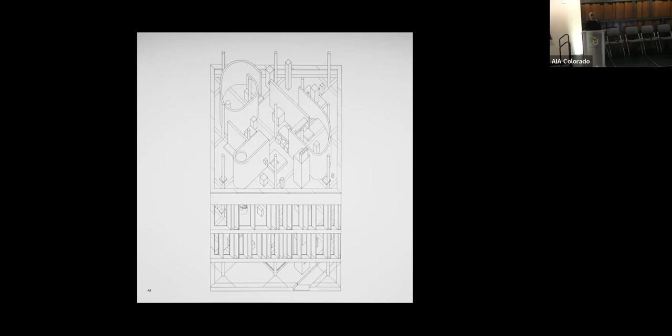But at the moment that I was then appointed as the dean of the Irwin S. Chanin School of Architecture, I also came full circle in confrontation with the work of John Hejduk, whose legacy served as the foundation of the school for over 30 years, and coming into recognition with what I found were some of the more formidable moments of his pedagogy.

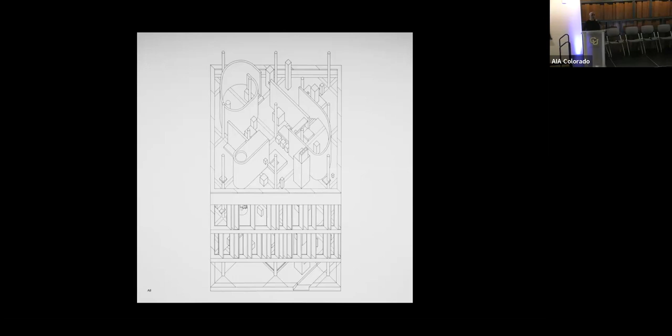This drawing is just one of the many chapters where you see the relationship between the plan and the elevation come into formation precisely through the collapse of projection, something that normally would seem illegible precisely because of the 90-degree angle. But in his case, the agency of that, the instrumentality of that kind of drawing allows him to rotate the non-supporting walls within the context of the free plan, which is suggestive of a way of drawing and thinking at the same time.

So the notion that drawings don't illustrate a preconceived idea, but that drawings are always already a mode of thinking through an idea, that the ideas evolve after the fact. Now, within that context, I was asked to do a drawing for the Storefront for Art and Architecture.

And I realized that somehow this is something that Steven Holl would never have done, but I wanted to apply the animate thinking to his project. Here you see the elevation rendered, as it were, in perspective, one point.

The rotation of that as a flat axonometric. Its rotation to show the thin end and the wide end. The line work is not showing, my apologies.

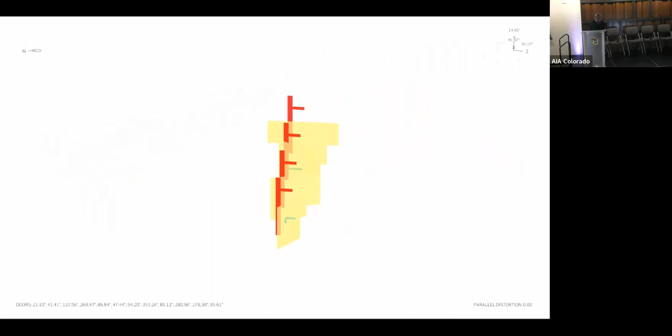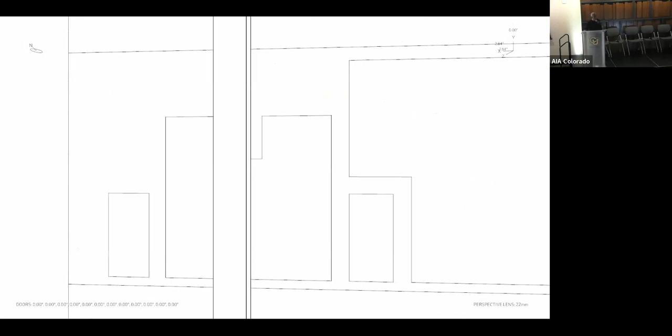Going from orthogonal projection to conical, slipping inside to see the projection itself, and then finally a rotation to a realist mode as we open the doors once again and frame the views of the outside, in a way capturing certain ideas embedded in different representational modalities compressed into one.

It's not a collage, it's more of a montage where these different modalities are brought into confrontation, where normally they would be done in what I would call an analytique, the French Beaux-Arts technique that we've seen, that projected often Renaissance relics, projections for archaeological digs that would imagine architectures that they didn't actually know existed, but through the fragment, a kind of design process would ensue. And the idea that even the fragments may have inconsistencies in them to demonstrate possible different ways of having conceived of the project.

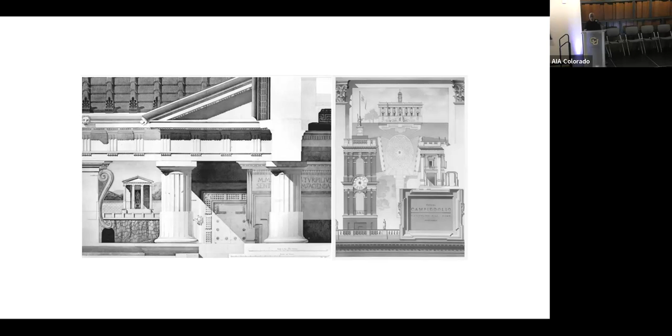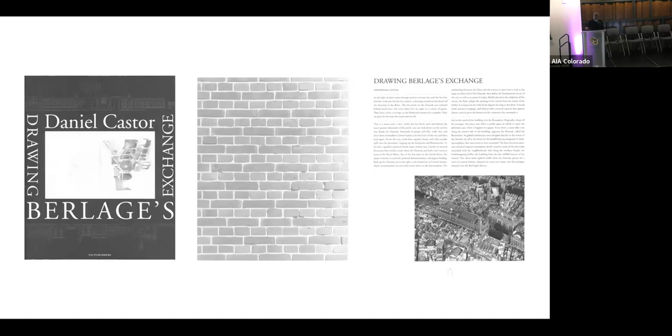So translating that to the work of Daniel Castor is an important part of this talk. A classmate of mine many years ago did a Mode B thesis at Harvard analyzing Berlage's Exchange building, which involves some of the most foundational things that I imagine all of you would find rather rudimentary and boring, but that is at the core of this discussion. And that is why we draw, why do we draw this way, and where might it lead us? I think his thinking had a significant impact on me.

He really brought it back to the kind of 101 level, the idea that he went to the building, took photographs of it, established the elevations, folded them out as you might in any archaeological dig.

And we applied that to a project, which I'll show you very quickly now. The project spans 20, 30 years ago, but it is the means through which I drew and then learned to draw again, and then again, through your generations. And now, as I look into the crowd, you're pretty monolithic as a generation, but I would say your grandfathers and your parents are also represented here.

So I'm learning how to draw again and again, basically going from sketching to drafting to AutoCAD to FormZ, and then to Rhino, and then of course to scripting at the end. So this is what you know best, so I'm not going to belabor it.

Essentially, this is the moment I was in partnership with Monica Ponce de Leon, where we went to Caracas and discovered the terracotta blocks, bricks, and tiles. I did this sketch on site, which effectively articulates what was possible to do for Casa La Roca. Not an entire courtyard building, but an L-shaped courtyard building with one brick screen wall that effectively blocks the in-laws next door, opening up to them but also concealing them, while framing the view of the rock after which the house is named.

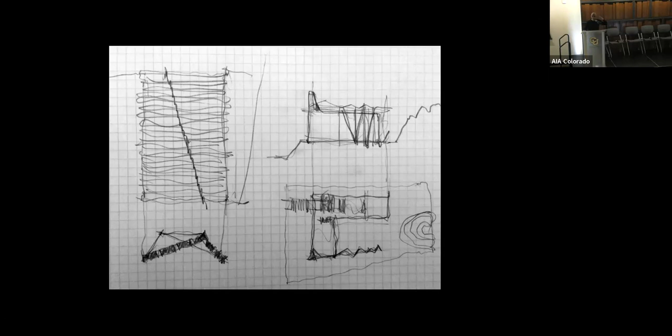Now, keep your eyes on the sketch to the left, which effectively shows a mode of thinking through drawing: a brick wall that through the fold gives lateral stability, something you are well versed with in the work of Eladio Dieste, Candela, etc. Within that context, bringing the discipline of drafting, the projection of a composite drawing from plan to elevation, to invent what we thought was the variable bond, essentially a rejection of the running bond on the one end or the Flemish bond on the other. The idea is that the mortar is the main protagonist here because it varies in dimension, a parametric construct intellectually speaking, drawn here in pencil to allow for the passage of light and air through what is a wall that is conceptually and figuratively a curtain wall.

Importantly, it also is a moment where you begin to see the instrumentality, not just of drawing, but materiality playing a role in that tectonics. The brick is not cut at that most critical moment of the junction of the diagonal. That is exactly the element that allows for the incremental corbelling to happen and the dovetailing of the brick.

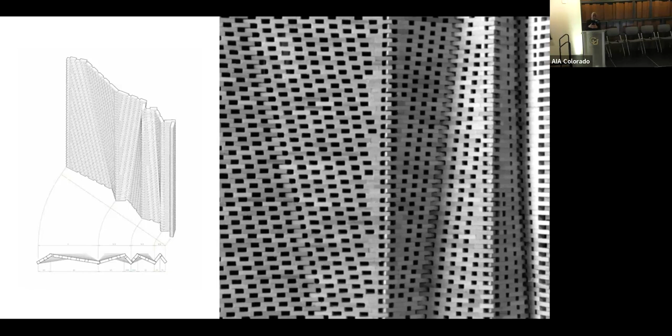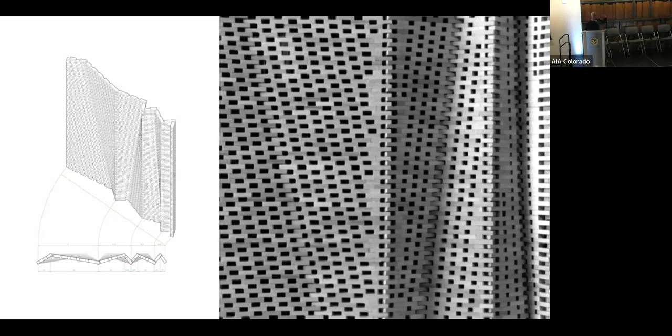Here, the model is not used as an illustration. It's a simulation of construction, although it's a half-inch-to-one scale model, about 2 feet tall by 6 feet long. It explains the kind of pre-installation mode of working that we were undertaking before we entered into a world that you are also very familiar with.

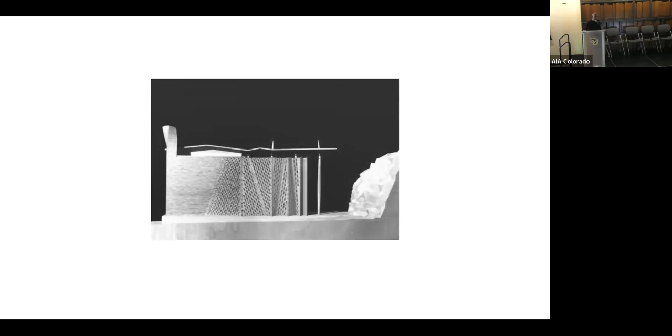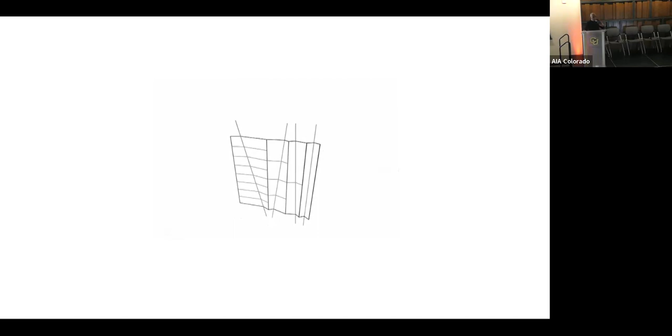The next chapter is when we actually learned how to do animations and established a dialectical relationship between the animate process and the photographic one, showing a kind of connection between the two, and the demonstration that at the end of the day, what you're doing when you're designing this wall is you're drawing out a very low resolution ruled surface.

In other words, you're not connecting the two upper and lower lines with lines, but with essentially bricks that are incrementally rotating in order to do so. I think everybody in this room has done one form of this or another.

This is a chapter you all know well, having to do with the advent of scripting that came 10 years later, illustrating the variable bonds that had been conceptualized two decades earlier. Now learning how to script something in a language which is non-visual but has radical compositional and visual implications, advancing that to the morphology of the building.

Keep your eyes not on the center of the page but at the four corners, because it is all being done numerically at this point. I nod my head to all of you who actually know how to do this in your dreams and sleep, what I still struggle with to this day.

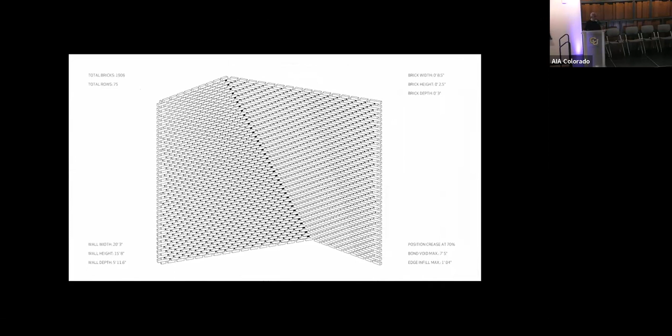So I take your attention back to Daniel Castor's work, which takes us to that delicate passage as you go from plan to elevation to section, and then to axonometric, particularly to the idea of the Choisy, reminding us that often it is not God's vision looking down on architecture, but actually the reflected ceiling plan, or RCP, that is the protagonist of architecture.

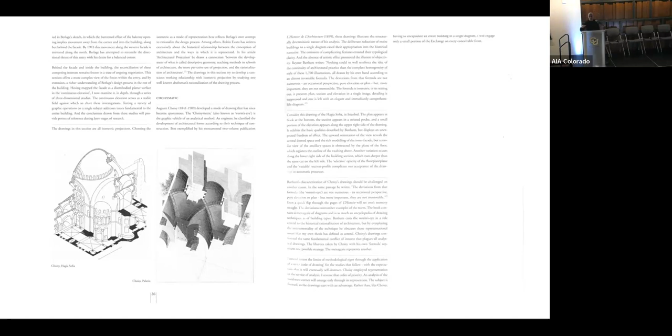St. Peter's is not a dome, it's two domes. The dome you see on the inside is different than the one you see on the outside, and the Choisy is one of the modalities that explains that. You could say the subheading of this talk is also about the reflected ceiling plan - it's just another way to begin this discussion.

As he progresses with the research, describing different ways of drawing, one of the most interesting chapters is the isometric, where the 120, 120, 120 angle gives equal weight to the plan and the two facets of the elevation. A sectional oblique gives dominance to the section or elevation, as a plan oblique gives dominance to the plan. This is one where the neutrality means there's something else at work.

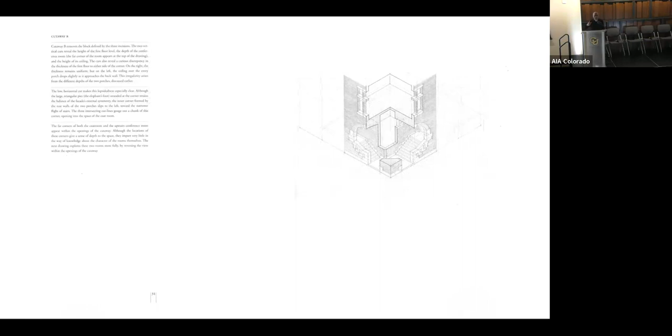Then all of a sudden he gets to the flip-flop representation, which completely changes everything, because the picture plane - that is the section of the window - is being looked down upon and up at it at the same time. Only the isometric allows that, because the angles are equal. So that inversion is possible, where you're looking up at the vaults from the inside, but from the outside you're looking down on the stairs. This allows you not only to imagine projectively how a project may be designed, but also how to analytically take something apart.

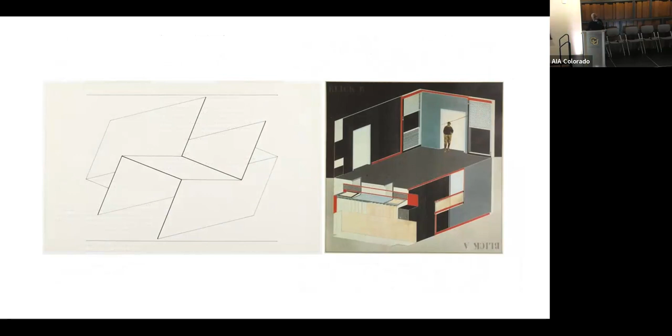Something I doubt Borromini was doing while designing, but this is now Castor doing this for us. Of course, he's not alone - El Lissitzky and many others have done things like this in the 20th century, but it's also a way of identifying a kind of disciplinary function that we all participate in.

I was asked to go to the American Academy a few years ago, and I saw in their billiards room a drawing by Michael Graves, very gestural, very rough, of the Tempietto - something you may have imagined done by Gehry, so very un-Graves-like. But it inspired me to go visit it again; it's only 100 yards away.

There are two things evident in visiting this project. The first is the axiality of the frame door into the courtyard and its relationship to the mantle, which is an extension of the poche of the wall, the thickness and mass of the wall, the solidity of this, displaced from the center - the apse is off center. Many of you have read the Robin Evans article that describes that, only to discover that as you round toward the back, this solid mass is a thin veneer. That mantelpiece is actually a thin slab of stone that makes a collusion between mantle and window.

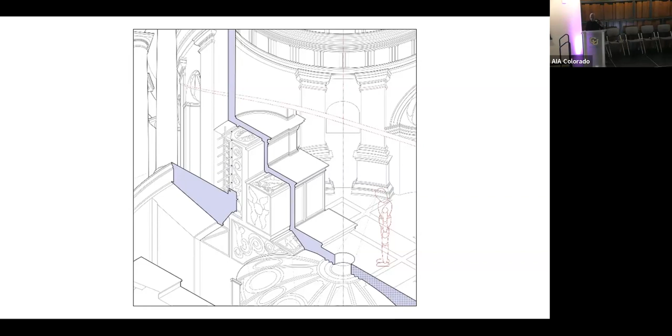As you walk around toward the back, there is a staircase and an oculus - a window actually - which ends up being an oculus that brings light to the crypt behind it.

There is no window without the mantle. There is no mantle without the window. These two come into dialogue with each other, which makes it all the more alluring as you realize that St. Peter's was planted upside down, looking up towards the sky, effectively looking at the reflected ceiling plan. That the cross was not planted like Jesus allows for a drawing like this conceptually to be done after the fact—six drawings done in one, looking down at the dome, up at the dome, down at the mantle, up at the oculus, and then down at the plan of the crypt, and of course looking up at St. Peter's, looking back up. Again, a flip-flop building done in the manner of Castor, but here done to a project which is not indifferent to the conceptual function of the flip-flop.

So as we begin to apply this format of thinking to the projects, I'll try to go fast through all of this in a more descriptive way, using the animations both as generative tools as well as post-game analysis of the projects.

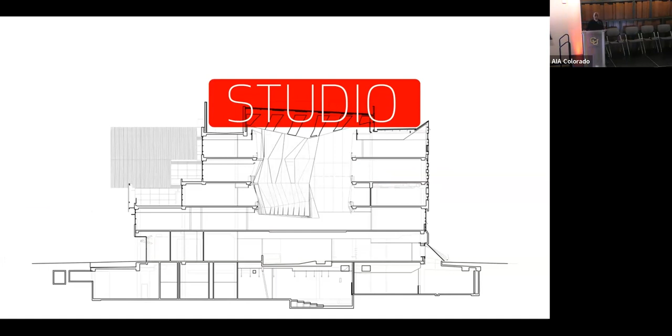In the context of the Melbourne School of Design, we were tasked with the design of a permanent studio space in an institution that had only had hot desks for many years, to rival it with RMIT. After a month, realizing they didn't have the budget for the studios, we had to find a financial diagram to widen the corridors, essentially altering the net-to-gross relationships to make a vertical studio space of hot desks, housing something around 1,000 to 1,500 students for what is otherwise a 2,000 student body.

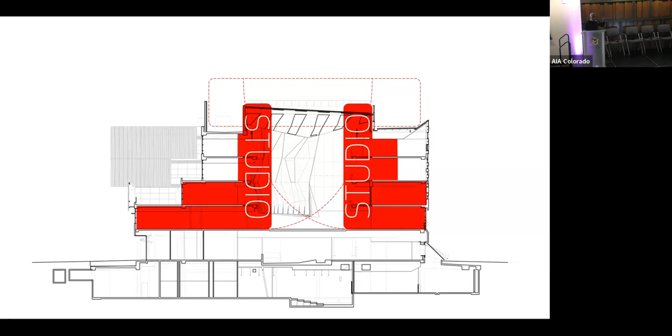Then robbing spaces behind them as you expand the studio space into classrooms, into exhibition halls, and so forth, in critical hours where you gain more momentum. So it's about timing and scheduling how this works, and then the stacking of the FF&E package to begin to articulate the guards of that atrium space.

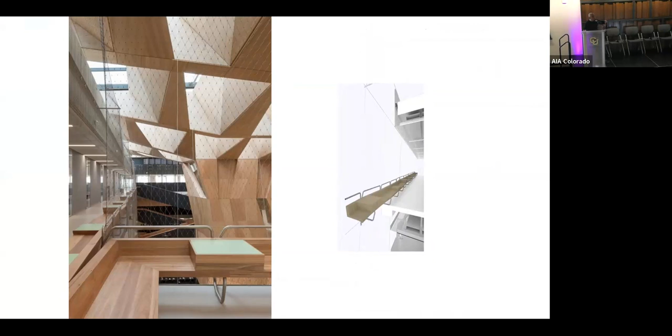So at one level, essentially creating collaborative tables for model making, for small conferencing, going up to drafting tables, and then going up again to crit spaces, all being shared by architecture, construction, urban design, and landscape. And so beginning to imagine in an interdisciplinary format rooted in the principle of shared space.

All of this coming down around a dedicated studio space—what is the suspended studio within the center. That, of course, harks back to the Tempietto in a meditation of what it means to do an object versus fabric. The Tempietto is the object, a monument within what is otherwise a medieval fabric around it, reinforced by what Gehry does in Berlin with the kind of zoomorphic head inside of the fabric of the office building. And in Kahn, an interesting meditation on a slippage where there is a dialogue between the structural frame of the concrete and the figure of the stair.

What we try to advance is creating a more organic relationship between the ceiling and the studio spaces—spanning 120 feet with LVLs that are almost 8-9 feet deep, rotating the coffering so that you get natural light, but not direct sun.

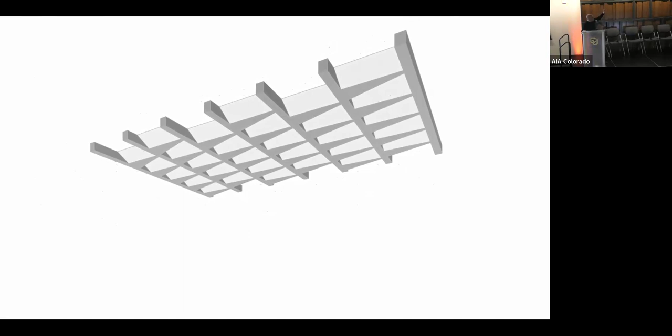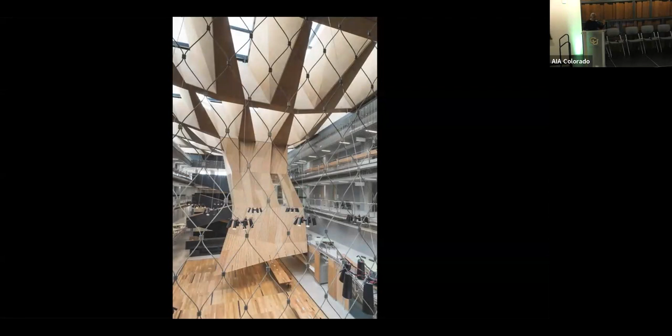And then out of the mass of that wood, suspending structure in tension, occupying the void of the monolithic wood in tension until you are at the thinness of plywood by the time you get to the bottom. So essentially a kind of reverse tectonic, as one experiences the levity of an architecture upside down at the bottom of the earth.

Mostly prefabricated. This is a project that was conceived for 24 months of construction, done actually in 18, and of course all done through BIM in a way that affords the kind of triangulated dialogue between design, engineering, and fabrication, and the insertion of an idea in there.

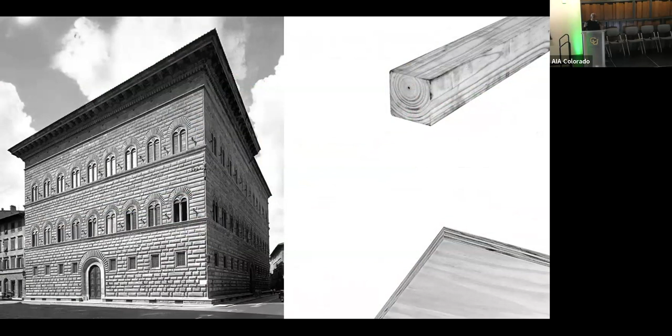You know, upside down at the bottom of the earth is a meditation also on Lawrence's text about the most horrible six months he and his wife spent down there fighting with each other. In our case, taking that metaphor and saying, what would it mean if the foundation of the building were not the ground, but the roof?

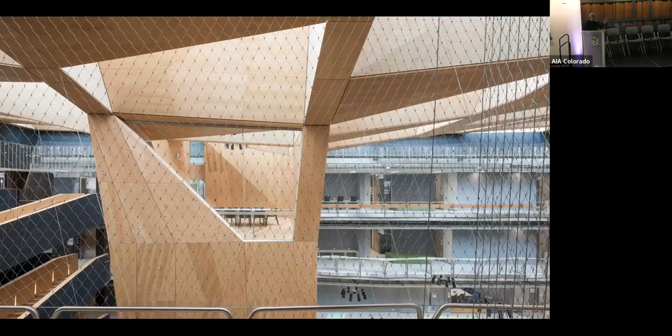And so inverting the rustication and suspending the thickness at the top and the thinness at the bottom. You literally inhabit that thickness at the top in the studios and conference rooms, and then you see the thinness of the veneers in the acoustic baffles at the bottom, with another open conference area in the atrium below. All of which comes together in this incredibly occupied social space.

I would love to say that it's all design students in this, but it's actually successful so much that people from the rest of the school are coming here, and everybody's quite unhappy about that.

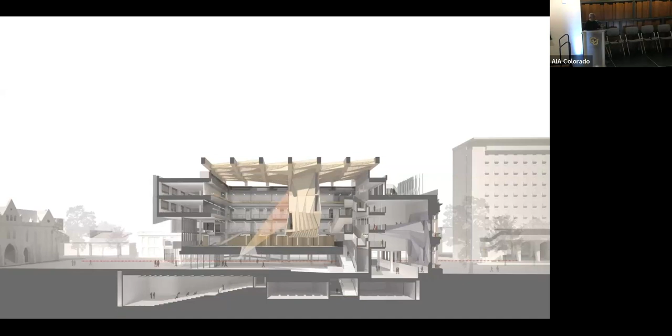Other aspects of this building have to do with the interdisciplinary environment and the Joseph Reed facade, an existing relic on the site, never meant to be there, imported from downtown Melbourne, always blocked up without windows or doors. Part of our task was to reinvigorate this classical facade by mapping it, putting structure behind it, mapping out the windows, inserting voids in them, rekindling the light and the passage of thresholds and doors, and giving it lateral stability, anchoring it back into the building, using that stability to create a void of a classroom, an open classroom within the context of its interior.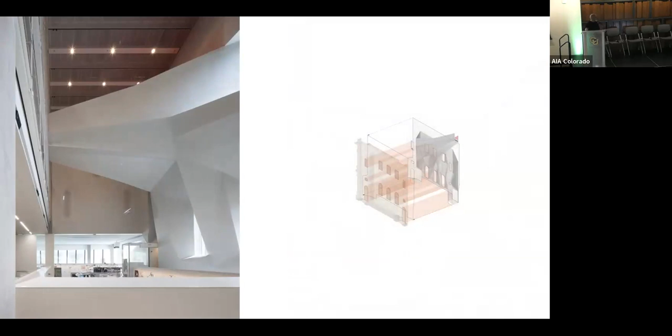That space again is another reflected ceiling plan, which morphs the logic of the interior facade into the belly of the classroom, and the classroom is inserted up there as a kind of balcony.

The idea of the animate analytique plays a more descriptive role here, but is certainly central to the Villa Varoise in southern France, set in a landscape that's quite beautiful and agricultural, but located in a very dense McMansion neighborhood. Our effort was to make a landscape project rather than an architectural project, inserting two levels: bedrooms at the lower level in red, and the living and master suite at the top overlooking them.

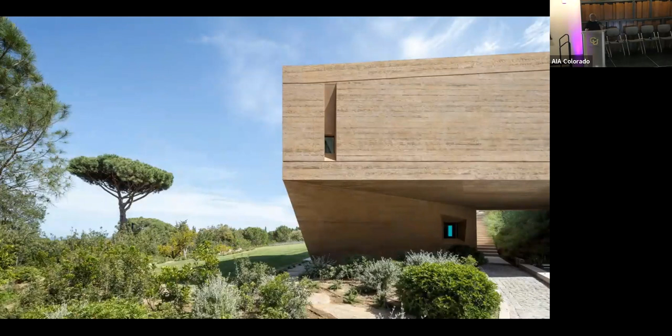All of it comes around the hinge points at the corners of the plans, where the staircases circulationally and structurally tether the two corners of the house together. The staircase is a cantilever. The front facade is a beam, and the typology is dependent on this structural motif to work. The engulfing of that stair also becomes the mechanism through which the threshold into the courtyard is formed.

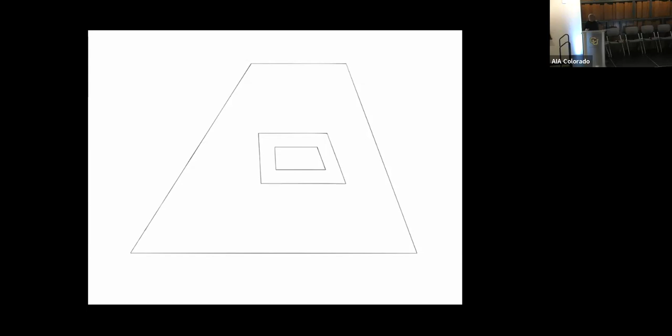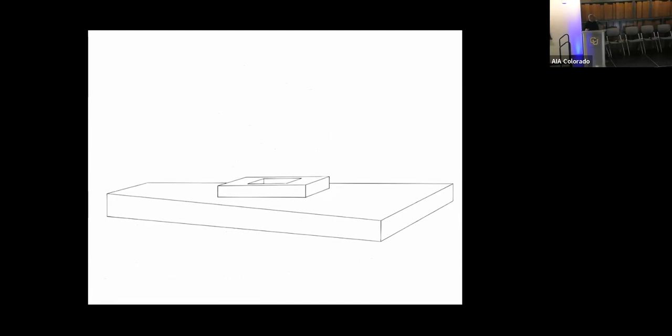The plan is distorted to allow for views to the Mediterranean and to the west where the Pinus pinea are. The rotation from plan to plan oblique shows that it's not on one level but on a sloped landscape, hence the terracing of the two wings.

The constructed version of the same thing in concrete, revealing the beam through which certain apertures are inserted into the master suite.

The beam, the front facade, is in fact suspended off of the retaining wall of the pool, which is a retaining wall of the sloped earth, but also what holds the whole house together. So you penetrate that as a beam as you get in from the master suite to its office.

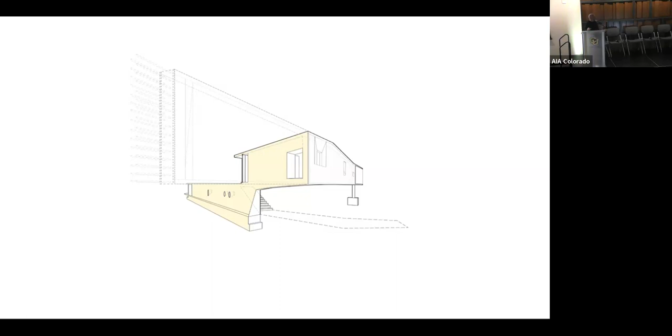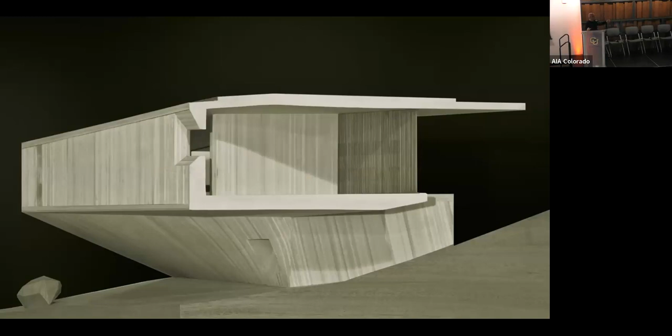The front door, the ruled surface of the threshold underneath the front door, takes you into the courtyard. I won't go into too much description of it, except to say that the board forming is effectively a constructive illustration of the ruled surface as you connect the top and bottom lines.

The reflected ceiling plan is the tool that gets you from here to there, and the side elevation shows the terracing and the outline of the stair that has been engulfed in the massing of that elevation.

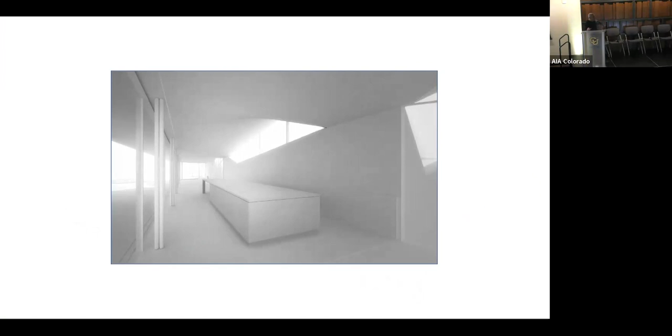The top level is effectively like a case study house, a glass volume that looks over the Mediterranean. You would think it's laterally structured, but in fact it's vaulted longitudinally almost 70 feet to allow for a large vault that connects you back to the western side, not only gaining light but the passage of air from east to west.

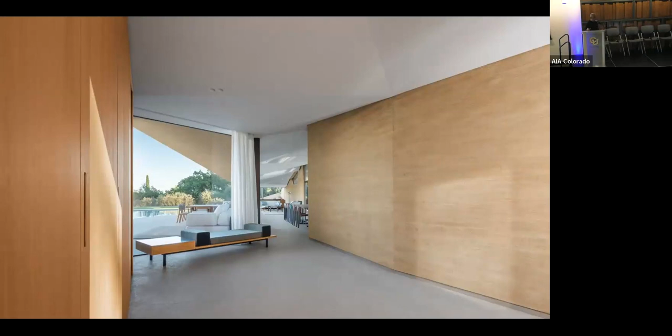These connections to the Pinus pinea are a central part of conceptualizing a house that absorbs light in very different ways throughout the day, with the reflected ceiling plan again being a critical protagonist that brings the house together. Here again, a framing of that outdoor-indoor relationship that is critical to the house: your capacity to stand absolutely nude with the two wings protecting your body from the neighbors, who are only a few feet away, and then the horizon of the Mediterranean beyond.

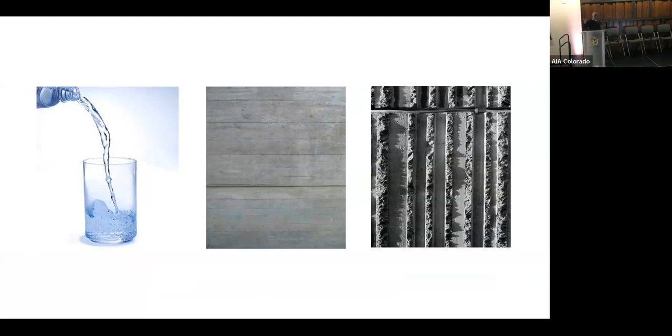A reminder, very differently than the rest of our work, that concrete does not abide by the rules of aggregation. The notion of a 2x4 or 4x8 panel, a concrete block or a brick, that concrete is a liquid medium. We were looking at different modalities of pouring concrete, where either the formwork is the index for its representation, or post-architectural hammering becomes the mechanism by which expression is given to it.

All of you are familiar with fabric formed work, both historic and contemporary, of our own colleagues. We were testing out different ways which ultimately we could not afford, but I thought it would be interesting to show you, and ultimately came around to the idea of the ethic of the aggregate becoming a central part of the representation of this thing.

This, in Taliesin, is something you all know of, but the aggregate becomes so large that it becomes part of the manifestation of the landscape within the concrete wall. So we asked ourselves, what would it mean to go from the smoothness of the finish of the interior...

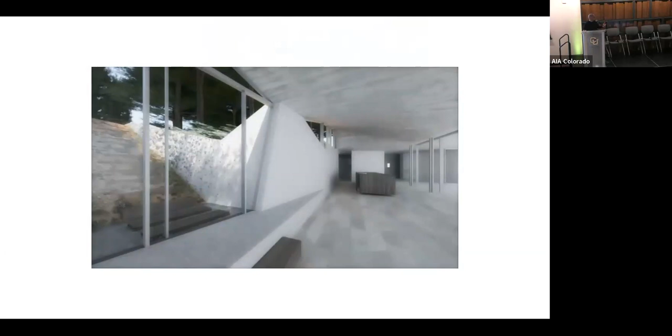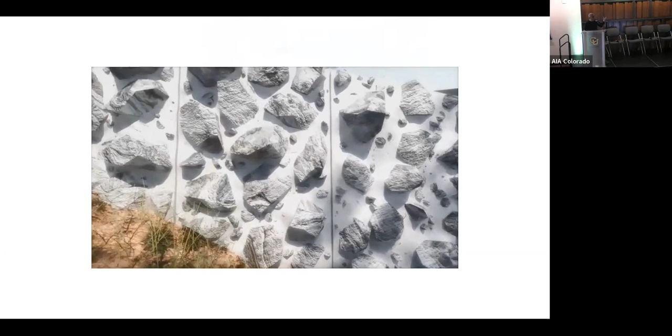Pouring segments such that the incremental growth of that aggregate within each panel reverses the figure ground of the mortar to stone, such that by the end, as you're in the countryside, the retaining wall is just a French stone wall that delineates the property. So it's a kind of gradient evolution of the aggregate, going essentially from a concrete steel wall to a stone wall.

And here, of course, the value engineered version: you end up sandblasting the wood using the local aggregate, which is quite orange and amber, where the concrete is masquerading itself literally as wood on the left side.

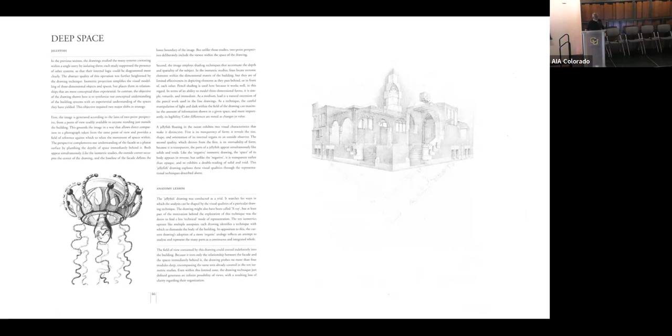One of the most exciting aspects of Castor's description of the Berlage building is the jellyfish, and the idea that with the jellyfish you can see the front and the back at the same time. The simultaneity of being able to see the front and the back is a critical part of his dissection of that building.

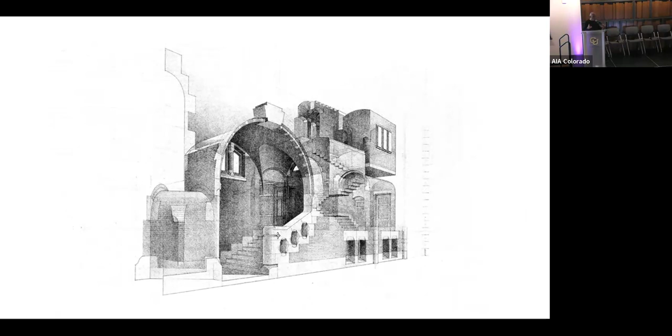And the rest of the book is committed to a series of these fragments of the building where he objectifies rooms, looks through the front towards the back, to essentially show the anatomy of the building rather than what we think of as the representation of the facade.

This kind of thinking is very much present within our work, even though I won't show it directly in the Adams Library, which is a participatory design process that essentially extracts any control you have of the design of a library into the hands of the community, involving elderly, adolescents, and kids, to create a plan that is trifold with three wings that bring all of them together around a center, the control station, a panoptic center within which all of them can somehow be controlled.

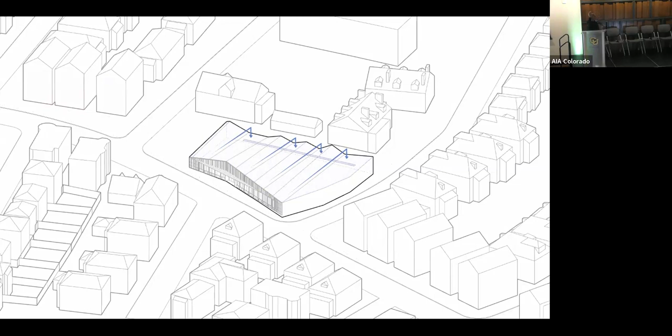The story of that library is that it's also on one floor with a monumental single pitch facade on the front side, and the back facade being broken down to the scale of the domestic residential neighborhood. The roof is the central protagonist of this thing, the fifth facade, and of course the sixth, the reflected ceiling plan, allowing for the passage of water to a garden in the back, the extraction of a southern court to allow for southern light, and the framing of a large oak tree that we saved as an outdoor reading room.

The three wings are then shelved on the north-south axis, while the beams run on the east-west axis, forming again a ruled surface described by beams, acoustic baffles, and lighting and mechanical systems that are part of the experience of the interior promenade that brings you through the building, and of course framing the oak tree towards the north.

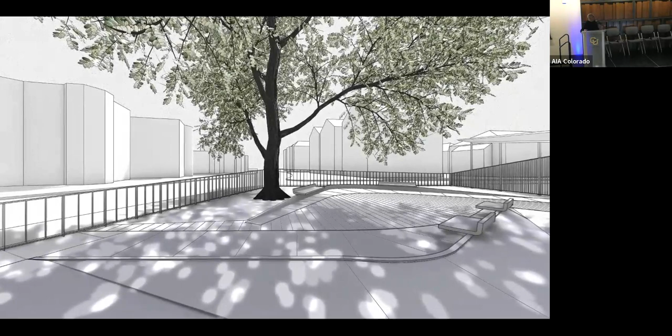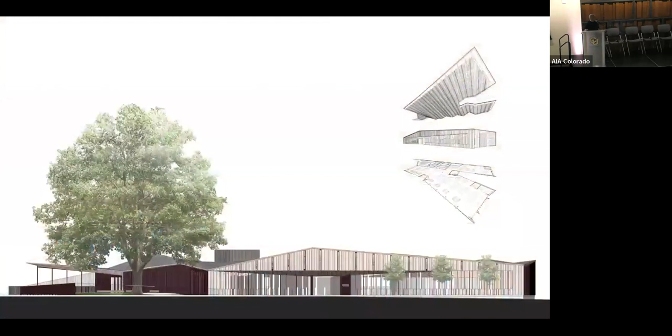Elongated pediment on the west side, with a storefront that exacerbates the kind of dialogue between inside and outside, and the incrementally broken up pitches in relationship to smaller programs for the kids on the east side, and the framing of the outdoor spaces with a pool garden on one side and the outdoor reading room on the opposite side.

Similar challenges and exercises were done in the Daniels faculty, where for economic reasons, it had to be a very compact building, but for strategic urbanistic reasons, it had to be a landscape building.

And so all of our effort was put into finding terraces that had direct and immediate uses from the inside towards the outside. This is important because...

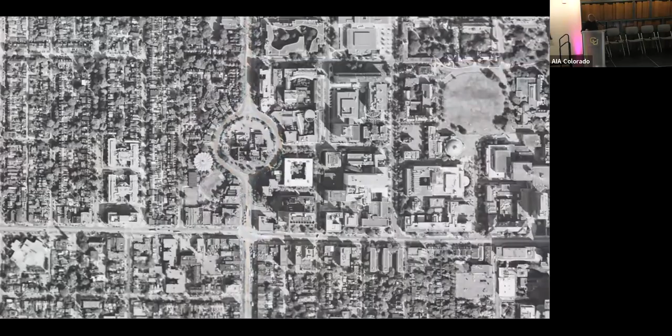Spadina Circle that you see on the left, occupied by what was the existing neo-Gothic Knox College, anchored the south with the potential of inserting classrooms, offices, and seminar rooms in it. What the school needed was a large studio space.

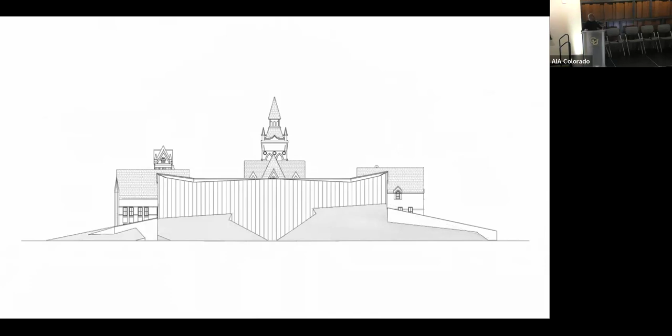What we couldn't get in Melbourne, we put here, with the idea of saving the tower as part of the vista, but also expanding in wings to the base that was the landscape, enlivening landscape rooms, as it were, as a central part of the commitment to reactivating the urbanism.

Around what was a roundabout is now an actual pedestrian space enlivened by bicycles and a safe way to cross from one side to the other.

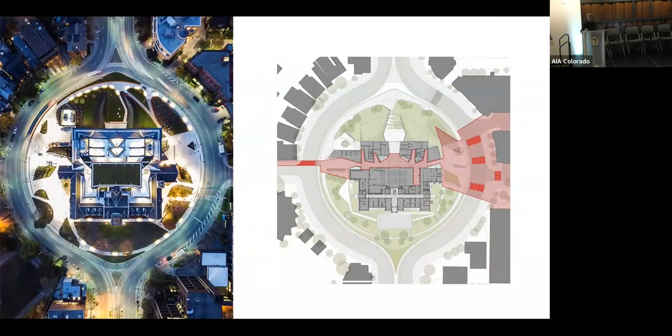While the symbolic facades are on the north and south, the actual active urbanism of the site is on the east-west, connecting UT campus to the Kensington neighborhood.

And so the inner street is what tethers together the cafe, the mailboxes, the Fab Lab in that center space, and the auditorium and the library as a piece of urbanism that is open 24/7.

And so within that space, you get to see the studio above, you get to see the Fab Lab in Spadina North right through the Oculus.

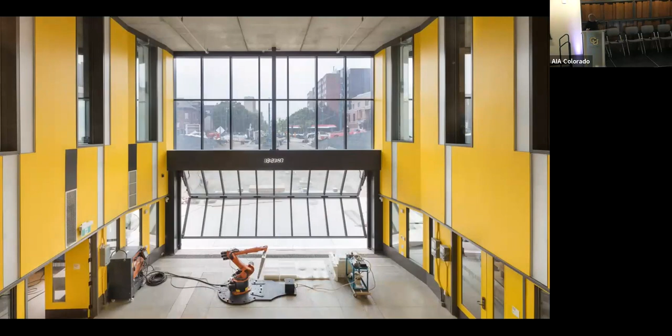It's a central part of connecting that back to the urbanism, what becomes very critical during the time of pandemic, where the stage and the connection between indoor and outdoor became one of the dominant classrooms and is now used like that for outdoor lectures and a central part of the urbanism of the site. Something we hadn't anticipated, of course, but that enlivened the strategy of the project.

The other protagonist of the building is that it's a concrete building, essentially, borrowing Candela's idea of the shell roof as a critical mechanism to span over 100 feet to create the studio space.

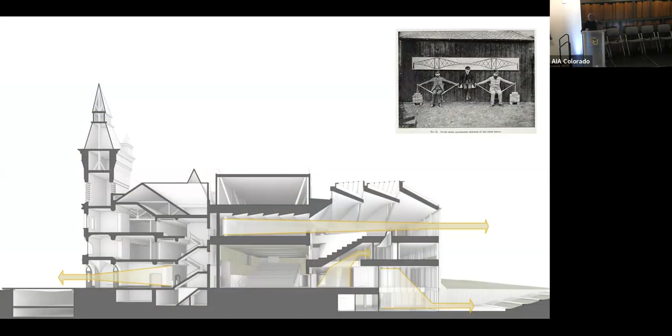All of that is generated out of a central space, the courtyard of Knox College, where an auditorium much like this extends out into other classrooms that are windows, kind of leak-out spaces for packed lectures. And so in instances, you see that studio space beyond and you occupy it.

When those lectures leak out, revealing also the main studio space that is part of that arena, connecting you back to Spadina North.

So we were communicated with by the contractors at a very late stage of the design, telling us that the roof we designed was unbuildable and in effect also unaffordable. But we said, why? If Candela did it, how come we can't do it? Anyway, it was $1 million over.

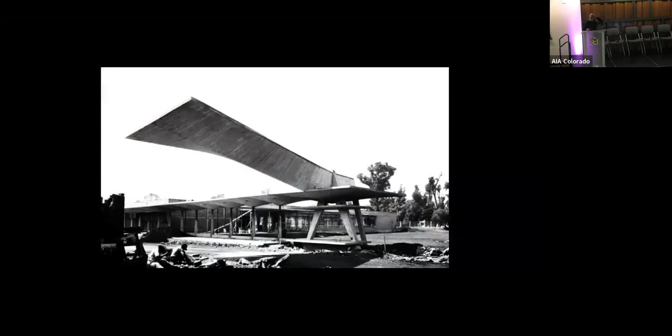And so we went through a patient exercise explaining to them how this might be done. But ultimately, as you know, through the value engineering process, it was impossible.

So what we did is we said, okay, what if we translate a concrete building into a steel building and built the mock-up in the context of our own studio space using a stick system?

The key here was an environmental issue, not a constructive one: the heating would be in the ground, in the concrete, but the cooling would be in a radiant panel above coming down.

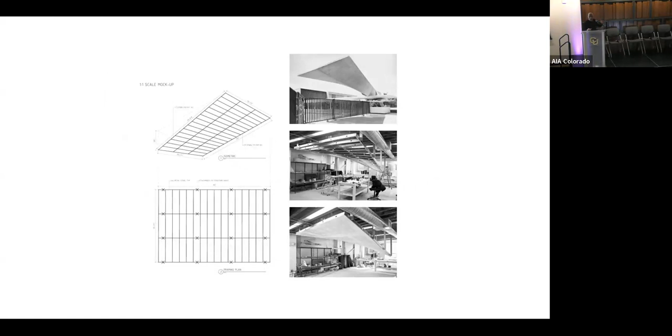And the structure was a stick system, essentially, which could be erected in half the time and without the formwork, so much less labor. And so it was built for $800,000 less.

Allowing for a lot of the things that you and I do in the context of installations to translate into a larger political capacity in the context of engaging in the means and methods of construction, to change the way that we think.

So I'm almost at the end and can end whenever you want me to.

But it takes me back to MIT where we were together. And as I stepped down, we were commissioned to do Site 4 dormitories and the gateway, which is a central part of bringing East Cambridge to MIT's East Quad.

That connects to the Infinite Corridor through a gateway, which essentially has all of the MBTA head houses and an elongated gate, the length of the entire block, articulated by what was the MIT bookstore that brings you from Main Street all the way to the East Quad.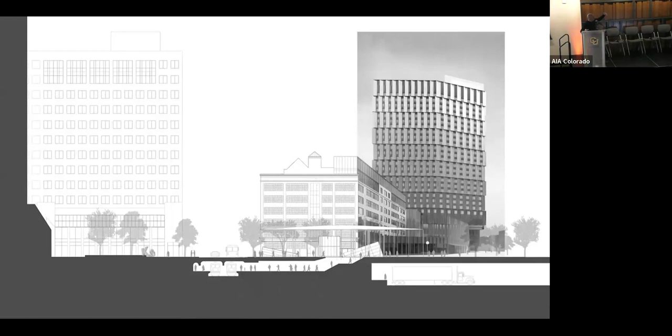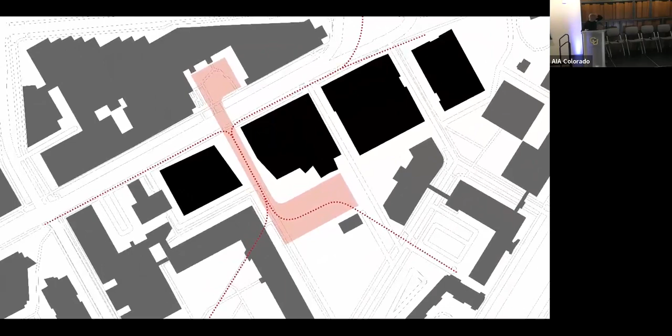The drawing that brings this together begins as an urban diagram connecting the two sides of Main Street, the main promenade that brings you down into the East Quad, engaging the admissions arena as well as the MIT Museum, transitioning a gate from a thin to a deep prospect, the diagonal connecting to the Infinite Corridor, the identification of the cores into the MBTA, and the promenade that stitches the whole thing together, rotating.

Poching down into the plan, connecting to the regional scale as one goes into the MBTA, and then rotating into section to allow for the immersion of that promenade to the street at the incremental, human scale, while at the civic scale, allowing the canopy to land on you — something larger than the sum of its parts.

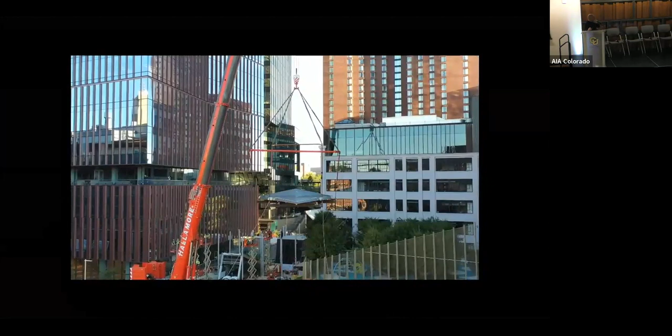Rotated into perspective to allow for that kind of immersive space of the building. Very different than our other constructions. This borrows not from the incremental aggregate notion of construction, but from the aviation and boat industry, creating two composite shell structures fabricated in Maine, transported to the site, and erected.

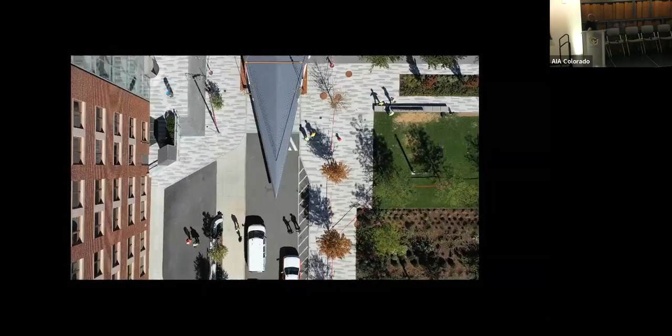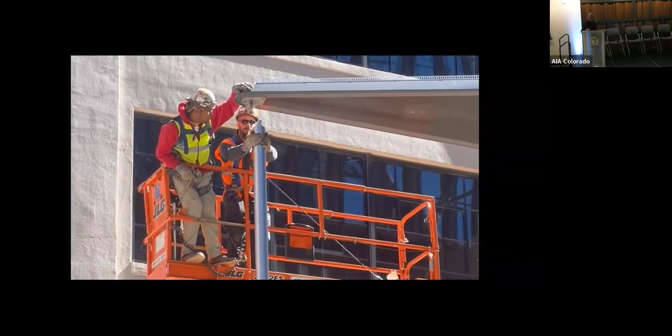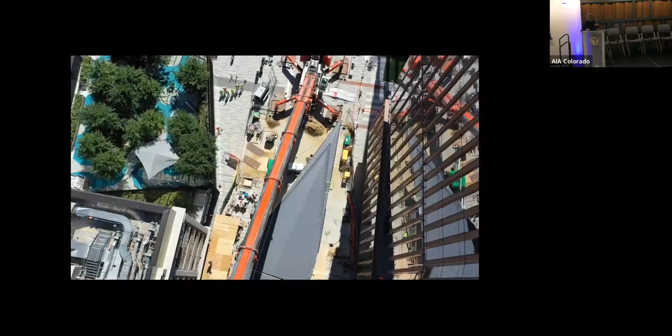Essentially installed in one sunny day that was not windy, straddling the columns almost like acupuncture, allowing for tolerances so that the columns could be wiggled and the two shells nested into each other, minimizing the complexities that would otherwise be required by traditional construction — beams, joists, ceiling panels, and a range of other things — and then the connection back to the skyline of Boston.

An image of it on just a pre-opening day. Now it's open and quite active. So I'll end with a quick postscript.

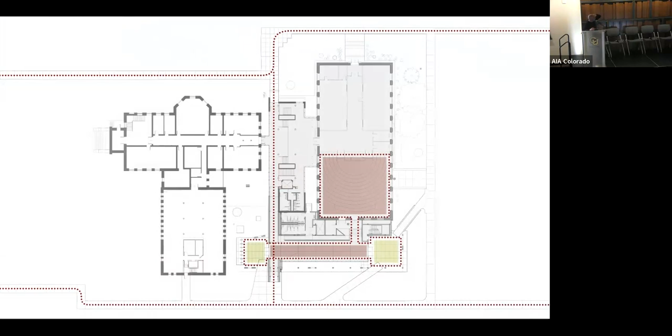A building that has gone up in the last month, also prefabricated, an expansion to the University of Nebraska's School of Architecture, emerging from this dialogue about representation — spanning from the urbanism of connecting the upper and lower campus through what they call the link between the existing buildings, urbanizing the auditorium into social spaces and exhibition spaces at the base of the building, connecting the buildings, framing a courtyard in the center, going from plan, rotating to plan axon.

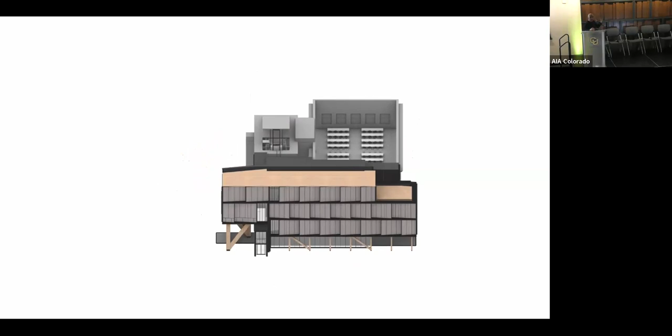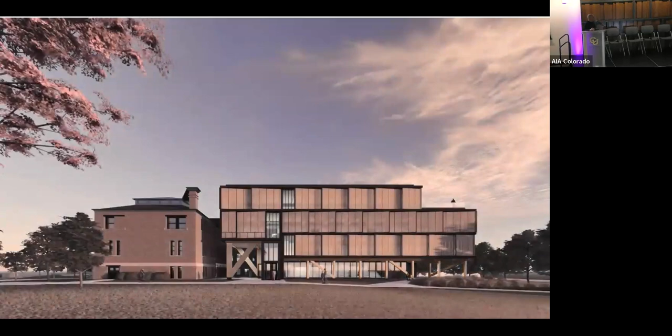This allows us to read the simple diagram of connecting to the existing core, economizing with a steel structure in the back to mediate between the brick and the CLT in front and the curtain wall. The budget of this building is radically limited and low because of the elimination of multiple trades, and the rotation now back into elevation illustrates the facade as a framing device that looks back onto the stadium in one direction and the museum in the other as the studio gets northern light.

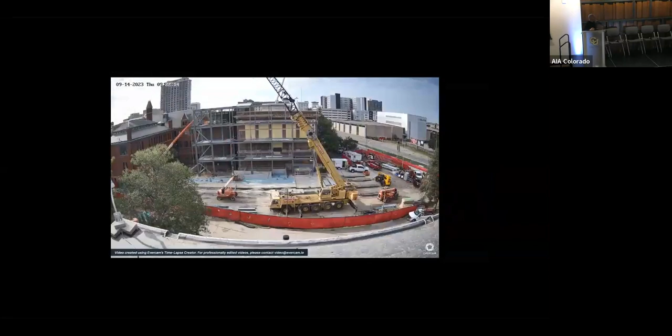Again, the promenade, the plan of the studio spaces, the urban spaces, and the CLT in action, mediating between the existing levels of the studios, and most importantly, the argument here laid out in constructive terms: the entire building was effectively framed and built in the last month, about a level per week.

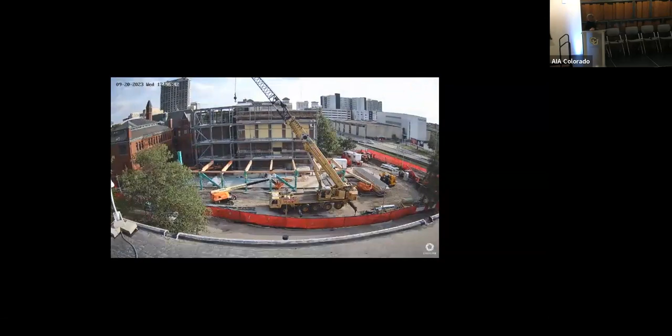And then finally, the argument laid out here is that this entire presentation revolves around the delicate relationship between generative thinking and analytical thinking — that which you do beforehand and that which you do after the fact, both legitimate, but exact ways of thinking in different passages and modes of drawing that are historically afforded to us. We borrow from history while also beginning to see different ways in which they can impact how we work today. Thank you very much.

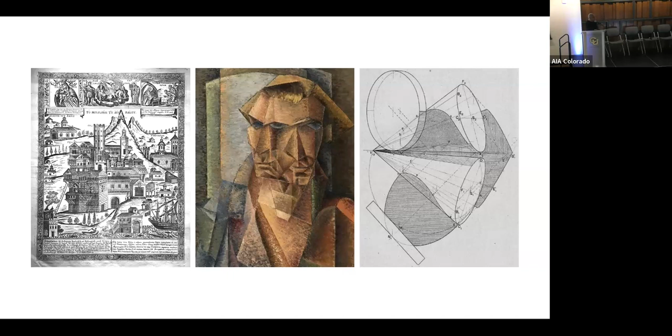Thank you, Nader, and thank you for the questions.